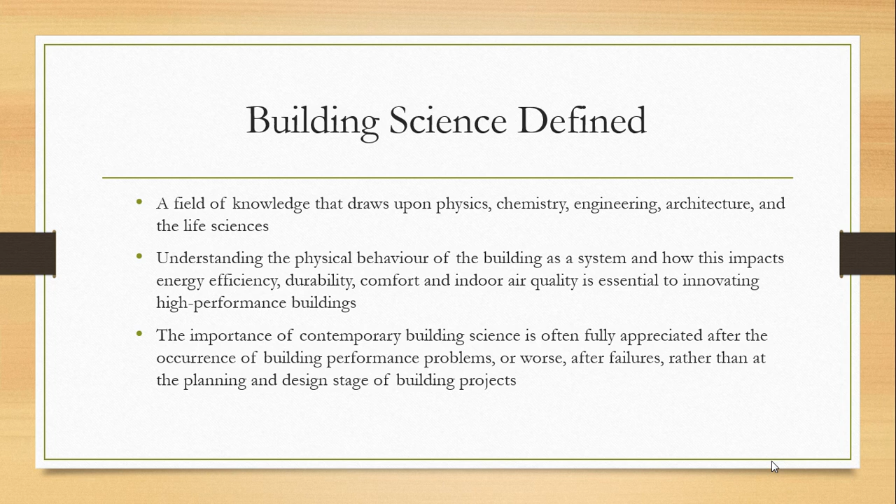The point we're making here is building science is really only appreciated after you have performance problems, maybe structural issues, air quality problems - all of these things arise. Only then do we tend to start thinking about how the building was planned and designed. Ideally this is not what you want to do. You want to actually apply building science concepts and principles in the early stages of your building cycle.

So as we're talking about the building cycle, let's look at what the full life cycle of a building should look like. It's not necessarily always like this, but this is the ideal.

To begin with, there must be a policy in place that informs the design of your building - what kinds of building codes and building standards are in place. You should have national building codes and standards that should inform how your building is designed and built.

Once you have that, the next stage is the planning of your building. You make a determination: what is the purpose of your building? How do I plan to achieve the purpose of my building? What steps do I need to take? What things do I need to put in place? What resources must I have?

Then you must also properly design your building. That's the next stage - this is where you start doing your building plans, and this is where the architect may come in. Next stage, you construct your building based on the planning and design that went before.

Commissioning of the building is where you reach the place where you make a determination that the building has met the conditions and is suitable for the use and purpose for which it was built. You must also have facilities management in place - this is important for building maintenance, which is essentially services and resources that help keep the building functioning as it was designed to.

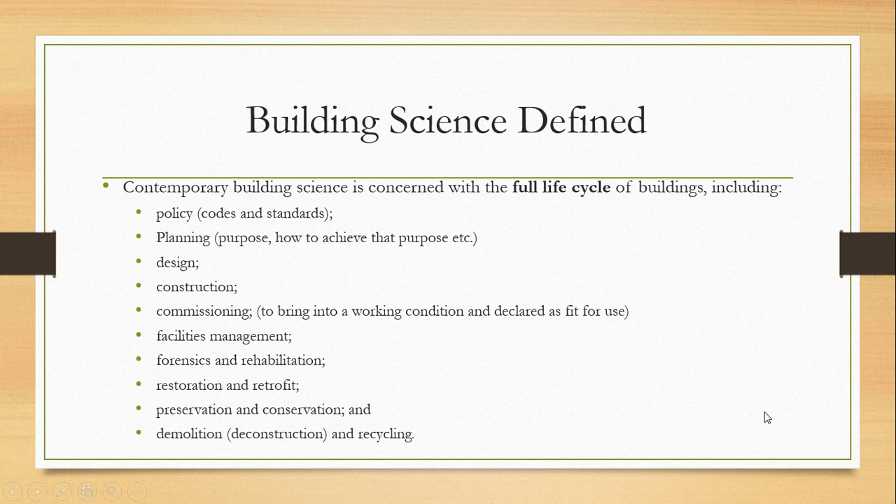So we're moving on. Why is building science important? We're trying to answer that question here.

Modern buildings routinely leak rainwater - this is often associated with design problems. We have air leakage as well, related to indoor air, which can affect indoor air quality. Where we have structural or design issues, we can have moisture entering the building, and we can have the wrong type of air, with heated air entering an air conditioned environment, etc.

These things can lead to damaging or unhealthy condensation, which can lead to a buildup of things like mold in your environment, which can directly and indirectly affect the occupants of the building. They can also lead to durability problems in terms of the structural integrity and strength of the building, which can shorten the life of the building.

Modern buildings demand higher predictable levels of durability, strength, energy consumption and comfort. For example, let's look at a public building - a public building would tend to have firstly a whole lot more people in and out of it.

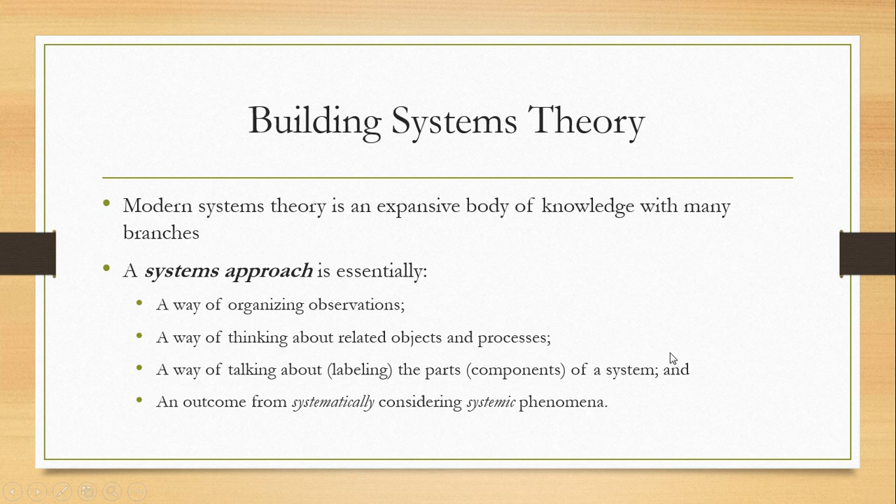We organize the building by objects. We observe what different objects we have in the building. It's a way of thinking about how objects and processes relate. In a system you will have objects, and then you look at how those objects are related to each other - those would be your processes. So in the building we have objects and we have processes taking place. The systems approach is also a way of talking about the parts of the system and the outcome of those systems in terms of achieving your goal.

So let us look at this in a little more detail. What types of systems do we have in a building? We can classify those systems into these general categories.

So we have boundaries and boundary criteria. Many people believe that a building system ends at the outer surface of the building - that would be like your outer walls, and in some cases maybe the property boundary. But in reality, the building system extends to the outer reaches of what it impacts and what impacts the building.

So for example, the building boundary could go to the basement - basement flooding, right? So vertically you could talk about the basement. Basement flooding can occur due to municipal sewer surcharge, and is an example of the building plumbing system extending to the local municipal infrastructure services. Here we're looking at another extension of the boundaries - all the utility infrastructure, such as sewage pipelines, electrical pipelines, and even your Wi-Fi network. All of these things will actually extend the boundaries of your building, because your building is connected to all of them in order to receive essential services.

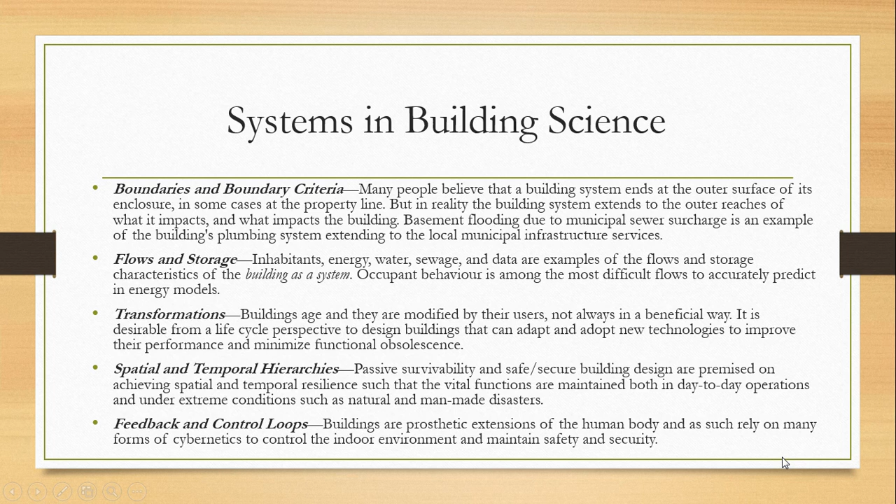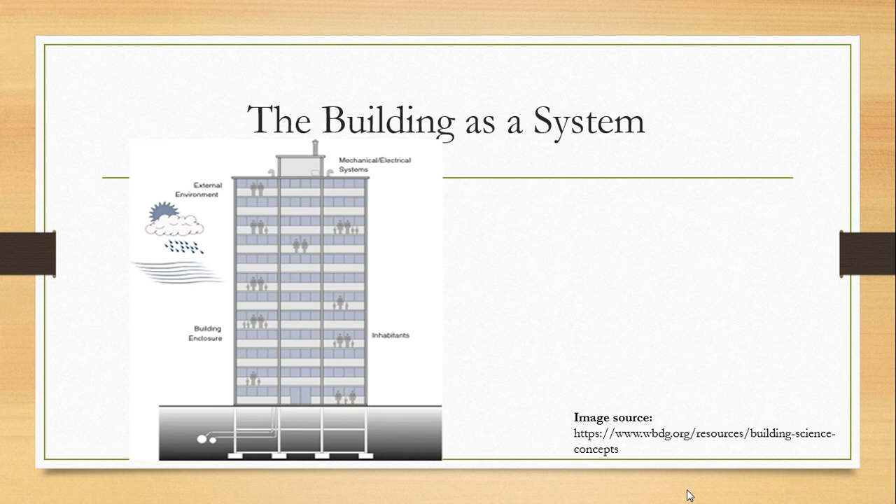So, physical forces and how they affect buildings. Some of the physical forces we need to take note of would be heat flow. If you think back to basic science and physics, we know heat can flow via conduction, convection, or radiation. We would look at that in a subsequent slide to make some real life connection with it.

In addition to heat flow, we have airflow. Air flows across and within building enclosures due to air leakage and ventilation. Within the building context, we need to be concerned about those gaps in the building structure and design that can lead to leakage of air out of or into the building, and also how the ventilation has been designed, and how effective it is.

Then there is also moisture flow we need to be concerned about, the flow of water and vapor across and within your building enclosure, for example through walls and windows. You have to be concerned not only about heat and air, but how you are able to control the moisture coming in and out of your building.

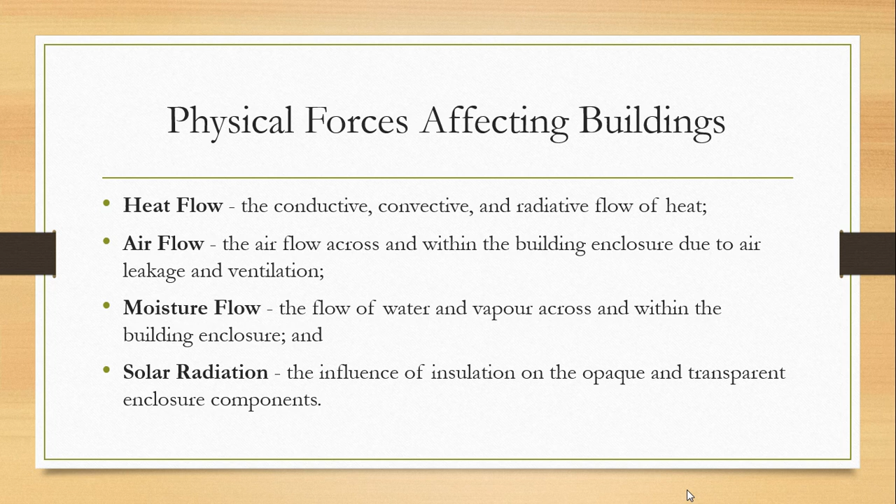That moves us into our HVAC system. When we talk about HVAC, we're talking about heating, ventilation, and air conditioning systems. Now during cold periods, heat and warm moist air escape through leaks in the building enclosure. This would be typical of what happens in temperate countries during winter, for example.

Heat from inside the building, heat and moisture from inside the building, can escape. To compensate, the heating system will have to work overtime in order to provide the heat that has been lost and to replace the moisture, so that the building will be more comfortable for the occupants' health and comfort.

During hot periods, this is more typical of what we might experience: heat and moist air are driven into the building from outside. What happens then? The heating, ventilation, and air conditioning must work overtime to provide the opposite of what happened in the previous point - to cool the environment and also dehumidify it to make it less moist. Because where you have the presence of moisture, especially built up over time in that enclosed environment, it can become a health hazard.

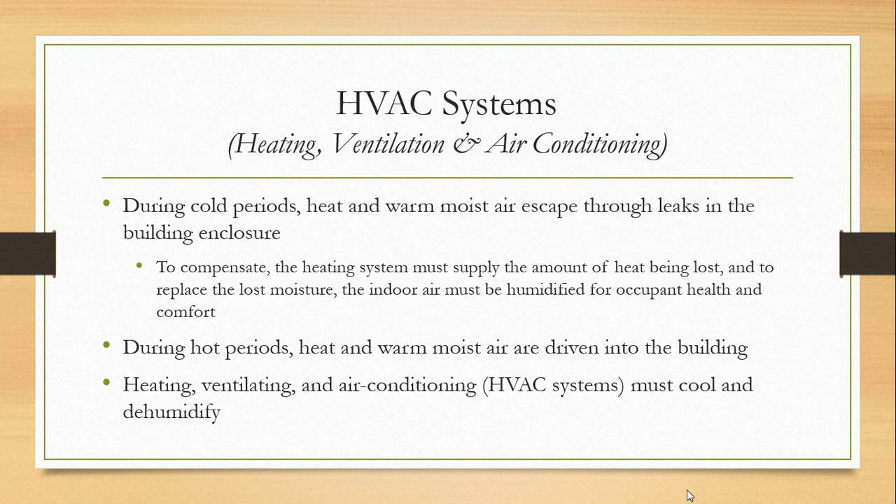Okay, so here we conclude this section of the lesson. We have a part 2 to continue on to. This section of the lesson, we conclude with a very important statement.

Okay, so at this point I would just like to ask you to please proceed to the next part of the lecture, part 2.